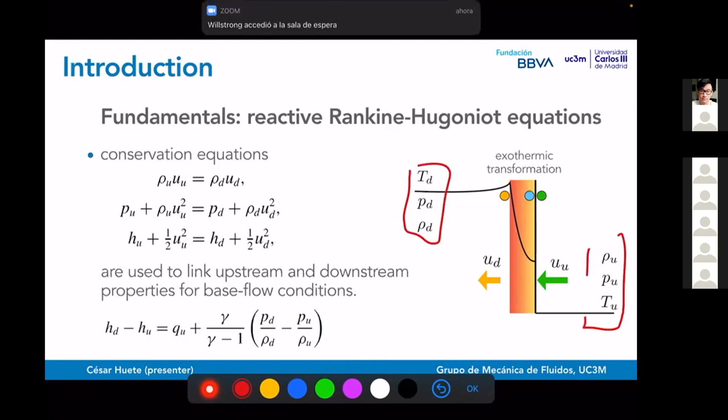If we look at that in the well-known Rankine-Hugoniot curve, it's quite simple to see what is going on. You start with the initial condition for density and pressure, or specific volume in that axis. And then the blue curve corresponds to all possible post-shock solutions for inert shocks, right? So if we take the Zeldovich-von Neumann-Döring configuration, we move from the green point to the blue point, and then we move downwards to the orange points, with the orange curve corresponding to the Rankine-Hugoniot for an exothermic reactive wave, that is, detonation. So far, it's quite simple.

The thing is that we have to be careful, because there is no length scale written here. From green to blue, it is of the order of the mean free path, but from blue to orange, there is actually a macroscopic, or sometimes even larger, length scale. So careful with that.

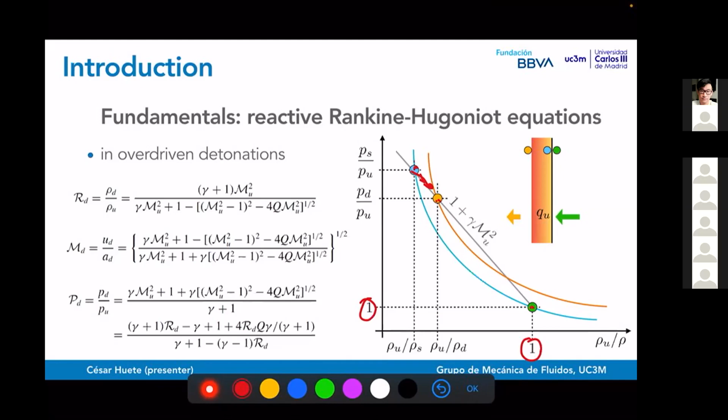Well, the point is that the Chapman-Jouguet conditions are the tricky condition for detonations, but are also those that really happen in nature. If I have a higher heat release, the orange curve moves upwards, and there is a maximum heat release or a minimum propagation velocity that is called the Chapman-Jouguet condition, right? Well, this condition is singular because this condition is given by the sonic condition downstream.

What it means is that if you trigger and you are expanding, you see that from blue to orange, we are moving, sorry, this is the other way around, to higher specific volume, lower density. So we are expanding, we are accelerating, we are having a rocket type effect pushing forward the shock wave, right? But this critical condition is the maximum expansion we can get.

Because if you look at the characteristics, from that point forth, I don't know what's going on. This is acoustically decoupled. We cannot affect outside because my region of influence is bounded by the sonic condition. So it's the maximum expansion I can get for a given heat release.

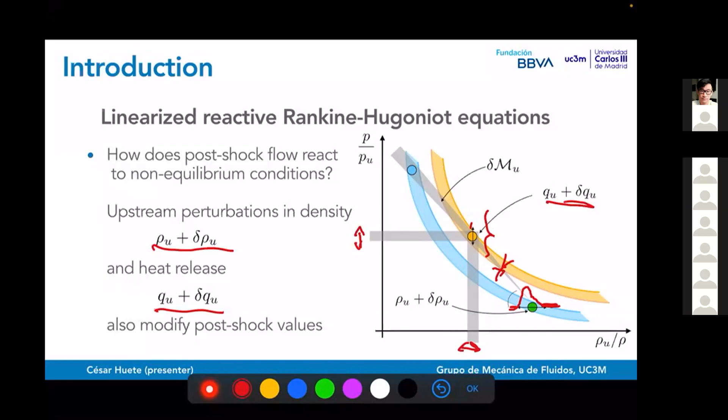And the shock also reacts with the perturbation in the propagation speed, so the slope of this Rayleigh-Michelson line is also affected by these perturbations. In linear theory, the amplitude of the perturbations downstream is of the same order as the perturbations upstream, right? If you include nonlinear terms, things have to be rethought carefully. So let's look at the initial value problem. Think about, instead of having a planar detonation, it eventually gets distorted, right?

And still we think about the fast reaction limit, that everything is burned right behind the shock. So we don't see an inner structure. And I will talk about the inner structure at the end of the talk, actually to get some feedback about some thoughts.

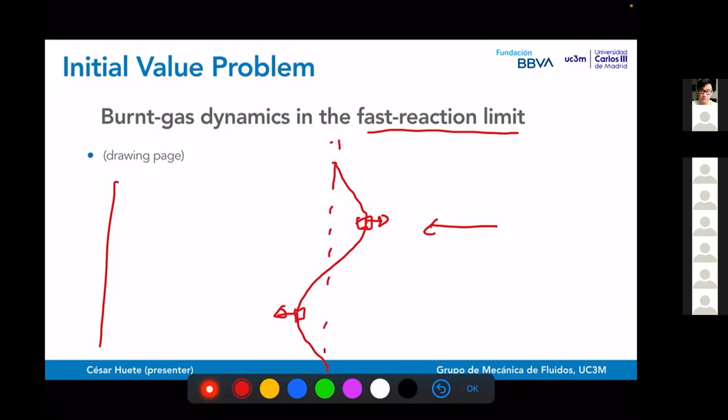But there is another thing which is even more important, actually coupled with that, is that because here, locally, we have an oblique detonation. So we are generating a transverse velocity flow downstream that in principle didn't exist upstream. So if you look at the final picture, what we have is this tangent velocity generated across the detonation.

And if you see what is going on is that, okay, I had a distorted detonation, okay? But because of the tangential velocity, I'm pushing mass here, increasing pressure. I'm increasing pressure here, and I'm lowering the pressure in this region. So the gas dynamics behind the detonations tends to reduce this distortion and actually plays the opposite role. The effect wants to move the detonation into the planar shape in both directions, right?

But the thing is that it's not that simple because this is a dynamic problem. And what we find at the very end is that if you look at the detonation amplitude, it actually oscillates, because there is a characteristic time here given by the speed of sound downstream and the characteristic wavelength. And this competition of these two effects takes its time. So it's like here I'm winning and losing and so on. Okay, so this is essentially what happens with the gas dynamics behind the detonation, if we neglect the effect of the inner structure.

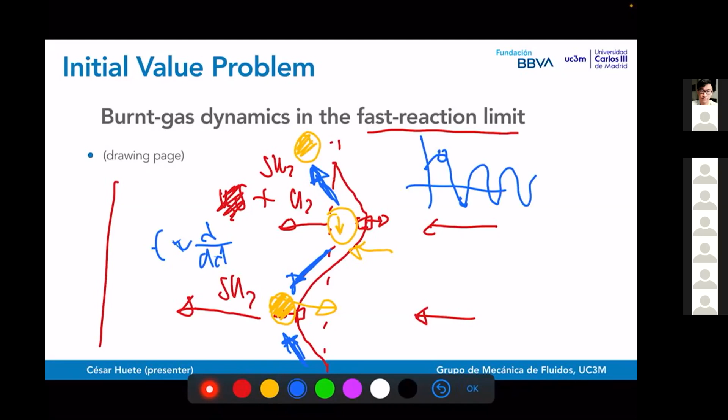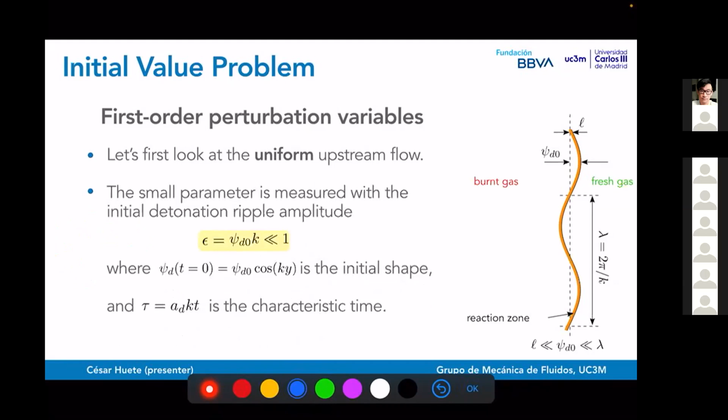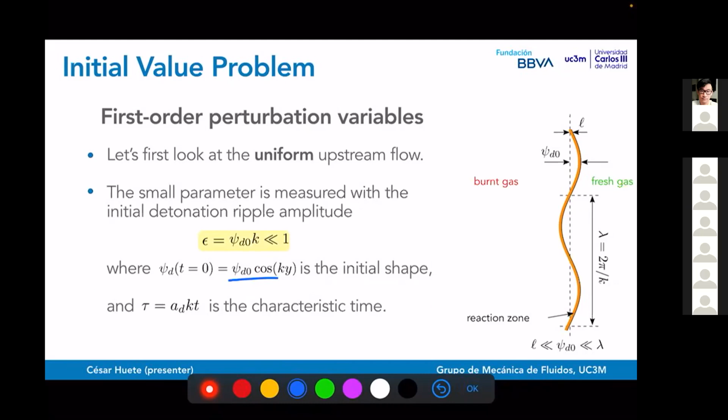But when you look into non-linear terms, this effect is important and plays a role, because you have to evaluate the weights of this term in comparison to other effects, right? So the same for pressure. We are looking into how pressure deviates from uniform conditions, the same for density, velocity, longitudinal and transverse velocities. And the initial value problem is saying, okay, at a given time provide initial perturbations. Let's see how the detonation evolves due to the gas dynamics counter effects that play right behind the detonation. Those I've shown to you before.

So to do that, the only thing we have to do, and it's not that trivial if you want to look at the transient, is to couple the Euler equations, because once the combustion is over, at this speed, diffusion and viscosity do not play any role at the beginning. Afterwards, of course, it will play a role, but behind the detonation, it does not. It's very high Reynolds. And you have to couple that with the boundary conditions at the detonation. And this is the linearized Rankine-Hugoniot equations that take into account the tangential velocity, and this is actually conservation of mass, momentum, and energy coupled.

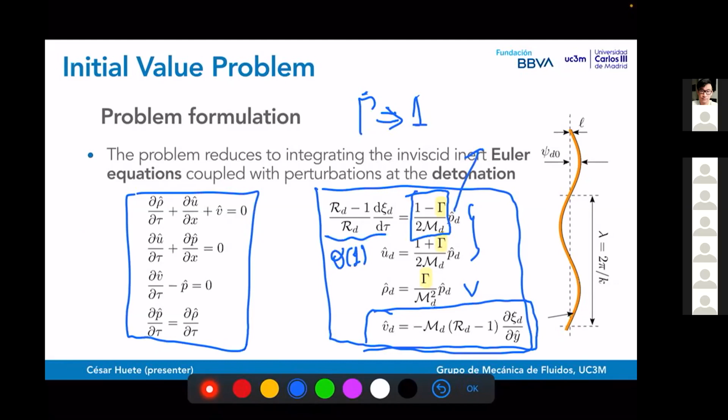Anyhow, what happens in the Chapman-Jouguet limit for the linear perturbation problem? If you remember, gamma tends to unity in the Chapman-Jouguet limit. So look at what happens here. This factor tends to 0. This is not 0; this is an order of unity term determined by the tangential velocity conservation. We have something that tends to 0 here. So pressure grows unbounded if you look at exactly Chapman-Jouguet conditions; it tends to infinity when gamma tends to unity. That's why you cannot place exactly Chapman-Jouguet conditions in the fast reaction limit.

To solve this, there are strategies that I showed in the detonation shock dynamics theory. You can decouple the sonic locus from the reaction region, and you can work it out. But if you look at the fast reaction limit, there is no way to get away from that. Fortunately, it happens in a very, very weak manner. I mean, you can move to weaker and weaker overdrives, and it's not that bad, okay?

So actually, the Euler equations, it's just the sound wave equation for pressure. As I told you before, epsilon, the amplitude, does not play any role in linear theory, and it has to be solved with 2 initial conditions and 2 boundary conditions. One boundary condition is given at the detonation, the equation I showed you before, the one that you cannot see right now. And the other is given by the piston pushing our detonation.

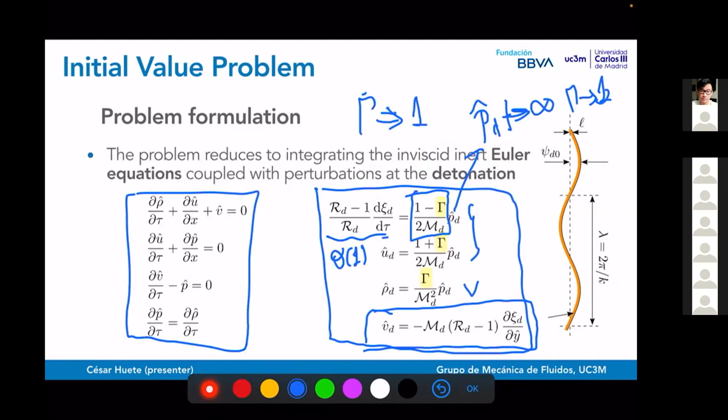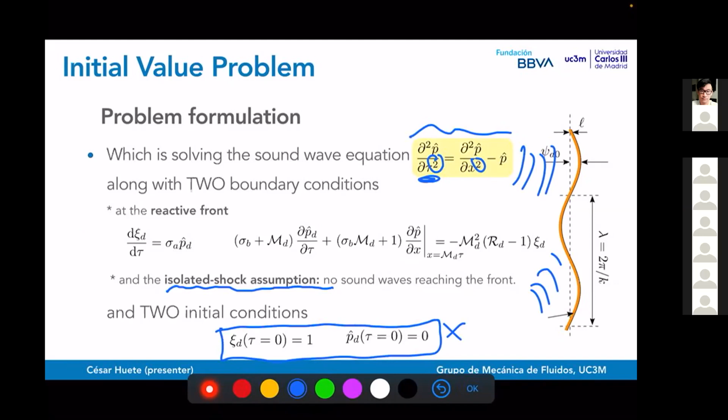If we assume that this is isolated, it means that there is no wave reaching the detonation from behind, okay? And this is a very justified assumption when we are dealing with weakly overdriven detonations, and I will tell you why in a minute. And then there are the 2 initial conditions. For the asymptotic problem, for the long time regime, they don't matter at all. The asymptotic value in linear theory does not depend on the initial conditions. But if you want to look at the transient, you have to properly take them into account.

So this is in the burnt gas reference frame. Let me show you first the laboratory reference frame. You have a detonation in space-time, and particles do not move until they reach the front, and the detonation pushes them, following the detonation, right? It's like an oblique detonation in the xt space, like in xy. It looks like a steady oblique detonation.

But here, if we want to stay in the burnt gas reference frame, we are rotating this in such a way that this is straight, and this is like that. Okay. So what we see is that in the burnt gas reference frame, the fluid particles are moving toward us, and then they are put at rest right behind. The important thing about Chapman-Jouguet is that these characteristics, which you can split into sound waves moving backwards and sound waves moving forwards, close to Chapman-Jouguet become parallel. Okay, the C-plus characteristics become parallel.

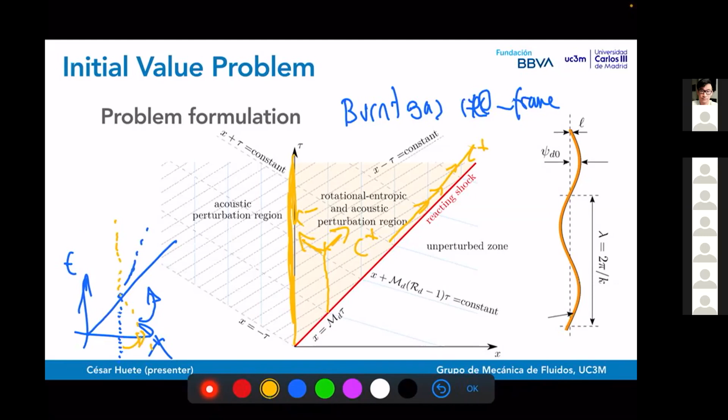But the most important thing here is that even if we cannot look into purely Chapman-Jouguet conditions, because they become singular, as we have shown before, they don't matter at all. I need a piston if I need some overdrive. I need something to keep the pressure higher than found in Chapman-Jouguet detonations. So I need a piston for sure. But the effect of the piston is negligible in weak overdrives because of the Doppler effect. And let me show that because I think it's interesting.

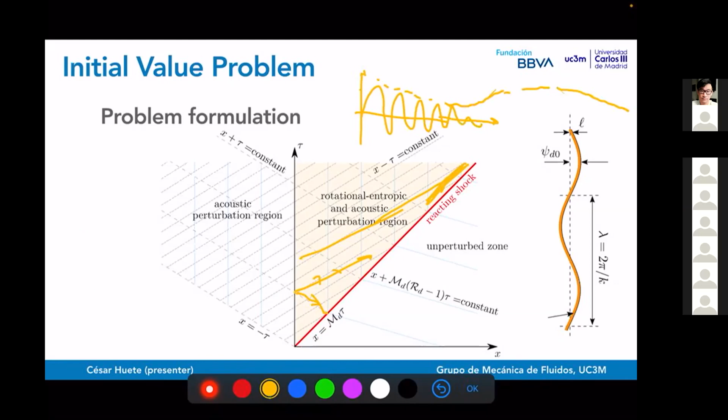Think about what I told you before. You have a detonation with a given frequency, oscillating in time, assuming that it is stable. Okay. If I include the piston, there is some reverberation, some reflected wave going back and forth, back and forth. But because these are almost parallel, this frequency is much slower. Smaller frequency, much larger wavelength, so that in our time reference frame, the role it plays can be neglected. So we can use this isolated assumption for weak overdrives.

I will not go through the details, but the point is that if you know the Laplace transform for the detonation pressure, or here the detonation amplitude, if you know one, you know the other, and you can do the proper integration and calculate the transient evolution. Okay, and this is, for instance, what you find for the detonation. Initially it is unity because it is used to non-dimensionalize the problem, and this is pressure. This is the history of the pressure at the detonation, and the other is the pressure in the whole

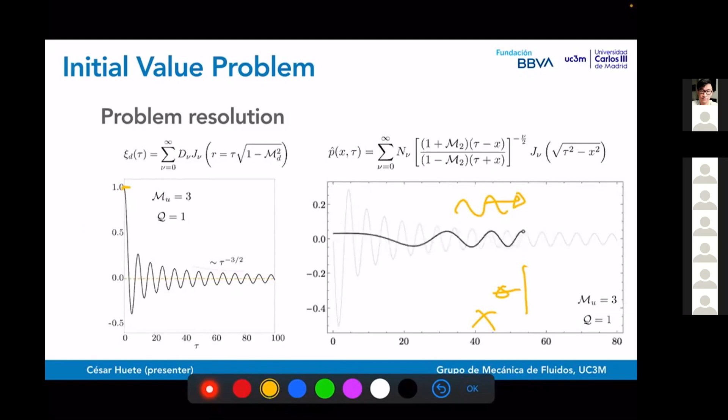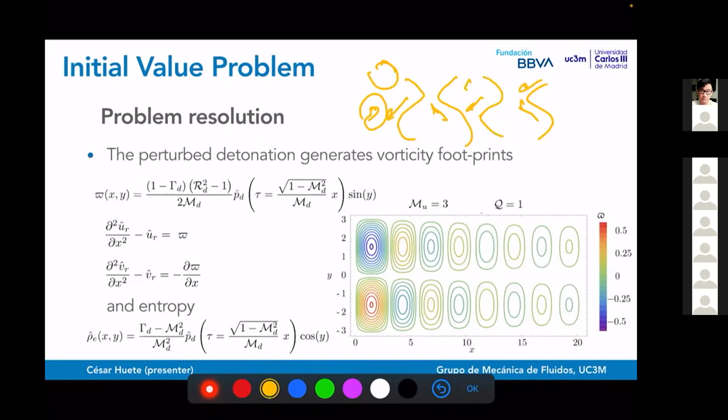spatial domain downstream. What you see here is like sound waves following the detonation. But if you place yourself at the detonation, they are escaping. It's somewhat tricky, trying to cheat us, but they are not catching up with the detonation, because we have assumed the detonation travels isolated. It's just a visual effect associated with these pressure perturbations, and actually with the dynamics of the detonation, moving like that to generate different tangential velocity patterns. You are building vortices downstream, so you can look at the vorticity footprints behind the detonation too.

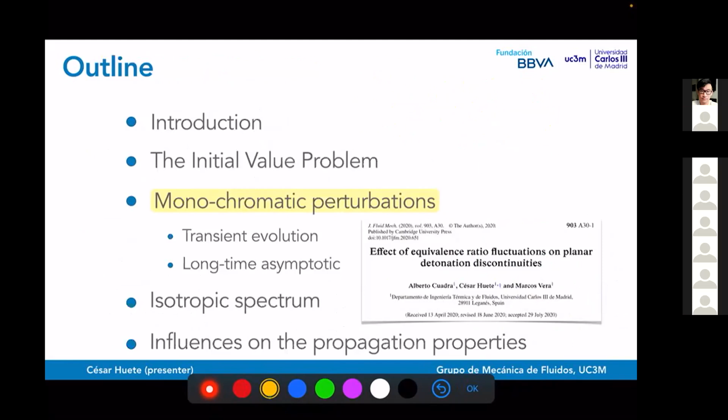Well, now let's look at the problem, and we'll see that the mathematical formalism is quite similar. So I think we are now ready to use it to include not the initial value problem, but a continuous excitation at the detonation front. So this is the problem configuration, the same as before, but I'm now continuously giving the detonation that here density is higher, here is lower, and so on.

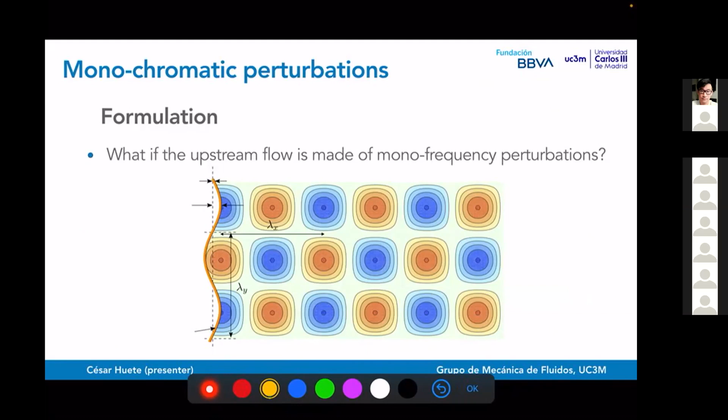So the thing is that now we are opening many variables. For instance, other perturbations, maybe perturbations in pressure, density, velocity, fuel mass fraction that is associated to enthalpy of formation. So you have many of them. Now you have to model not only the detonation, but you have to model why your flow upstream is not uniform. So you need to set your problem in a proper configuration.

And you say, for instance, if you are looking at what is usually done for shock waves in turbulent boundary layers, you can apply the Morkovin hypothesis to correlate density and velocity perturbations. If you are dealing with some turbulence mixing, depending on conditions, they are correlated in a different way. So now you have like two problems that you want to put together. One is the detonation, and the other is what is giving you the perturbations upstream, okay?

So now we have the length scale, but we also have the detonation length scale associated to the thickness, right? So for the thin detonation to be okay, you have to be in the limit that this is much smaller than the perturbations upstream. Because we have two lengths, two independent lengths. They are different problems. I mean, this perturbation has nothing to do with the detonation thickness. So that's why you have to say something from the external model about which one is the dominant one.

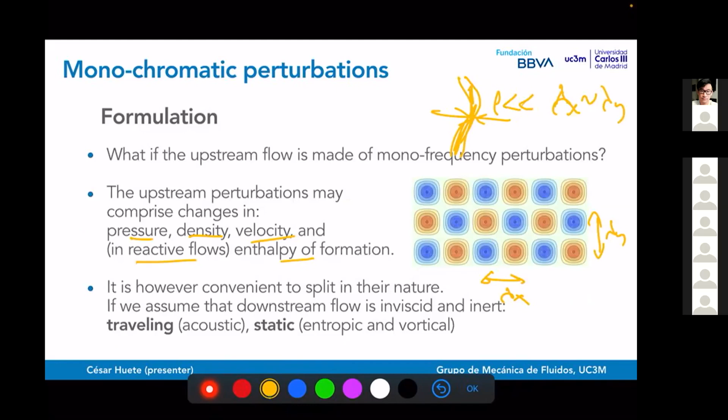Well, we are lucky because detonations are typically led by strong shock waves. So if you go to the Rankine-Hugoniot equations, the same as shown to you before, we see here that we have this term that converges to an order of unity value for a strong shock, but in the denominator we have the Mach number. And for pressure, we have the same thing. This is order of unity in the strong shock, and the Mach number grows unbounded with the shock strength.

So we can actually neglect the velocity and pressure perturbations if the amplitudes are of the same order as density, because what dominates in the strong shock limit is density. The reason for that is quite simple. If you look at the mass compression ratio for a shock wave as a function of the Mach number, you see that it does something like that. For a planar detonation, you have a lower density downstream because of the expansion of the reacting flow.

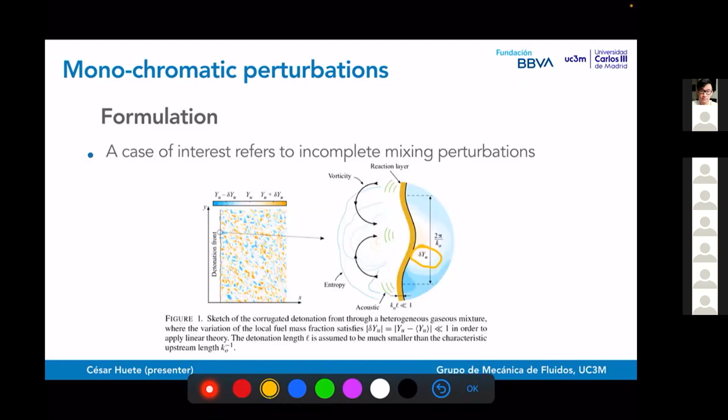So that justifies, even if you have a mixing effect where density, pressure and velocity are not in equilibrium because of the mixing process occurring ahead of the detonation, forgetting about the other variables. You have to focus on the upstream density because this dominates the detonation behavior downstream. So the case we want to look at is what happens with incomplete mixing upstream. We have to model how variations in the fuel mass fraction relate to the variables that affect the conservation equations.

And I think this is the most important part to understand the role of these perturbations. Think that you have this non-uniform pattern upstream, with some points having a positive fuel mass fraction perturbation and others a negative one with respect to the average mixture. If you have a very light fuel, the positive fuel mass fraction gives you less density. If you are on the right-hand side of the heat release peak, these perturbations give you a lower heat release. And this counter effect produces destructive interference.

Less density is less opposition. I want to move forward. Lower potential, lower expansion, lower push by the expansion. It wants me to move less. I mean, in talking perturbations. So they compensate each other.

I mean, compensate. We have to look at how big they are. But qualitatively speaking, they compensate. So they render a destructive interference. And the same occurs here with the opposite signs. Now, if we have less density but a higher potential, these two effects go in the same direction.

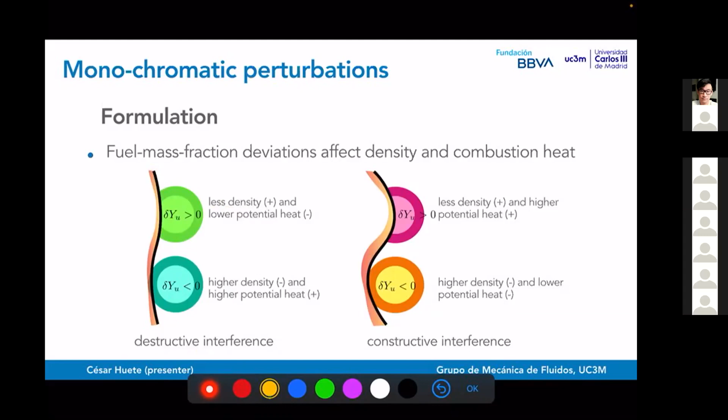Less density, the detonation wants to move faster because there is less opposition. Higher potential, higher combustion heat, it wants to move also in that direction. So, for instance, what can we do to look at that? Is to look at different curves for density as a function of the fuel mass fraction relative to the stoichiometric mixture, and the same for, okay?

So looking at that, for instance, if we look at this curve for methane, we see that this density is practically linear here, it's almost linear with the fuel mass fraction, and we have positive values of the fuel mass fraction. Perturbation will give me lower density because the slope is negative.

And here we have the other curve, which is the potential heat of combustion. If we are close to the stoichiometric condition, we have the maximum, not exactly at that, but roughly speaking at that. We may have constructive interference on this side and destructive interference on the right-hand side. And we can get the opposite thing if this slope is reverted for heavier fuels.

And this, actually, I didn't comment that, sorry. Yes, no, it was here.

The perturbed density is given by the average plus the variation of the fuel mass fraction times this slope. This slope is how density changes with the fuel mass fraction. And we have the same thing here. The variation of heat release is the average value, and we include the variation of the fuel mass fraction, and H is the variation of heat with respect to the fuel mass fraction.

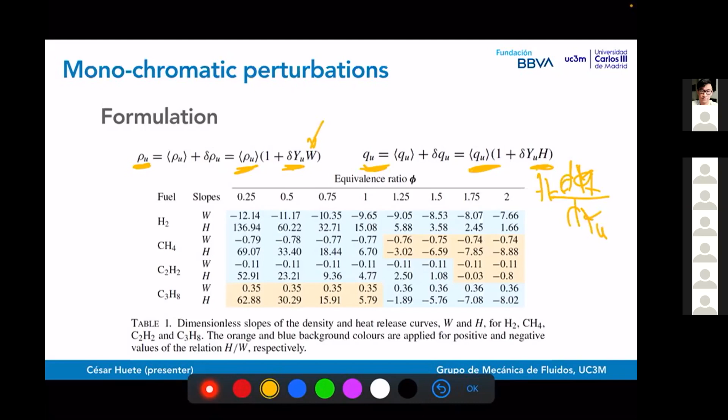And we see these blue and orange regions correspond to positive and negative interferences, as I told you before. So how can we solve this problem when we have a continuous perturbation field upstream? So this is the same as before. I mean, these are the same equations, but we have to include this upstream excitation term.

And this is what we do if we look directly at the asymptotic theory, when we assume that we can actually apply normal modes analysis. And here we have our amplitudes relative to whether we are in heavy or lighter fuels, and on the left-hand side or right-hand side of the peak in the heat of combustion.

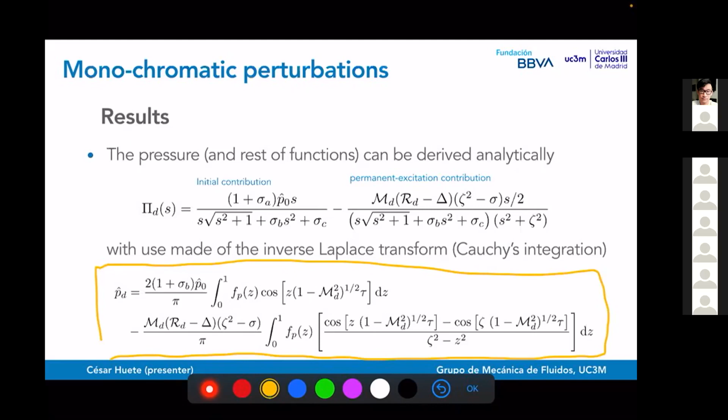So the good thing about the perturbation analysis and the Laplace transform is that we can get exactly the pressure as a function of time. So this is an analytical expression. And we find different solutions depending on the oscillation frequency. If the detonation oscillates with a low frequency, low in terms of this kappa x, kappa y, which is actually lambda y over lambda x, right? This is of course the wave number and the wavelength.

It generates pressure that decays in time. If the frequency is sufficiently high, it crosses this value unity at this critical frequency. I mean, it scales with that critical frequency. That's why the key thing is unity. You have constant oscillation of pressure following the detonation, the same movie I showed you before.

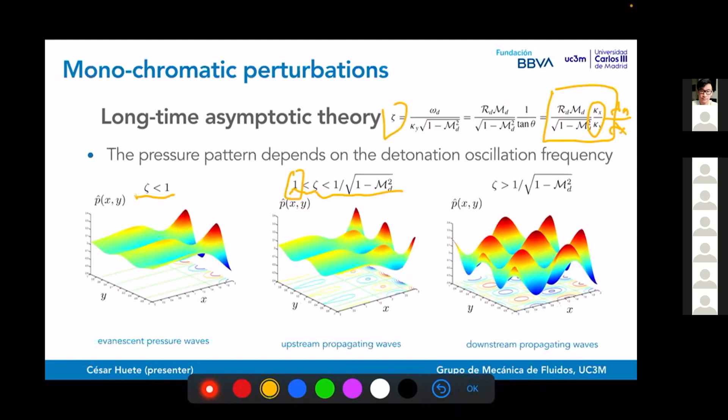And if the frequency is sufficiently high, the vector defining the pressure field points backwards, and all your downstream flow will be filled with sound waves. Another thing we have shown in our work is that you can find solutions where there is no pressure perturbation downstream, and they are given by these counter effects between density and heat release.

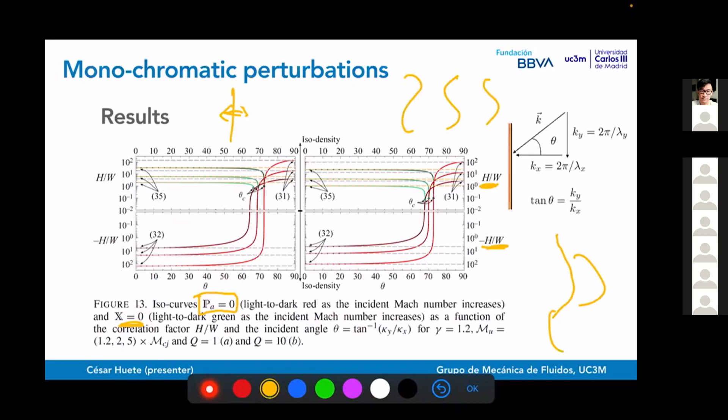pressure disturbances downstream. But you can also get conditions where there is no ripple. It's like this destructive interference is giving you no ripple, but it's giving you a longitudinal oscillation. It's moving back and forth with respect to the planar position, right? But it does not generate a ripple. So that's a very nice thing we solved for.

We can also compute, and this is important to calculate the turbulent spectrum, the value of, for instance, the rotational contribution of velocity as a function of the angle, right? So depending on the angle, which is essentially depending on lambda x over lambda y, you get a different value of the density or velocity perturbation downstream.

So here it is plotted in a polar plot. I think it looks nicer, but at the end of the day, if you look at this angle, depending on the angle, you have a different amplitude for these perturbations. You can do that for velocity, density, pressure, or whatever.

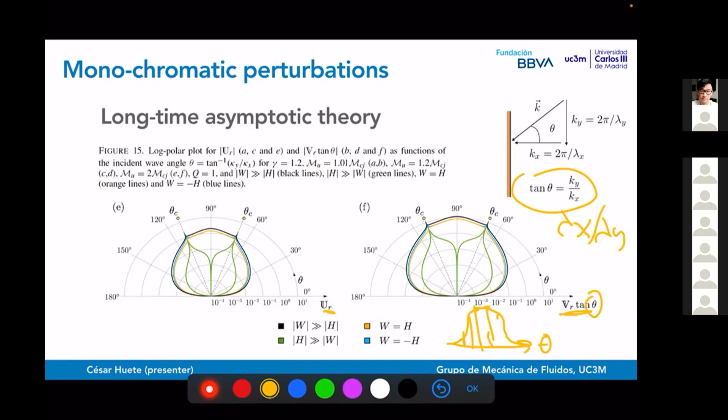Now, these amplitudes were given in the long time regime, applying normal modes analysis, what I showed you before in the equations. You cannot use the normal modes analysis to calculate the transient evolution. And we have to be really careful about that, because if you are close to the critical conditions, close to zeta equals unity, then it takes a lifetime to get the final asymptotic value.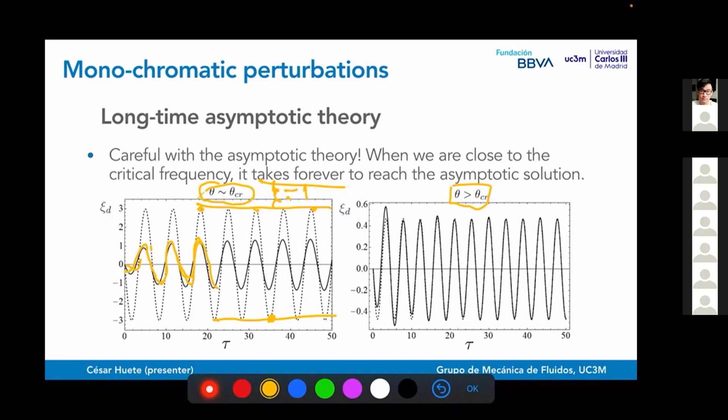This is the asymptotic expression, what the normal modes analysis gives you, and this is what is actually happening at the detonation if you start the initial value problem from the beginning. So it might be unrealistic to consider this amplitude in the long-term regime, because it takes forever to achieve that. And if you move to a higher frequency, the asymptotic theory and the transient evolution are effectively the same after three oscillations.

So an open question that I have no answer to is what happens if we include nonlinear perturbations, something that can be done with a numerical code. My question is related to one of the hypotheses I assume here. I'm assuming that the detonation is stable, okay? It's like a base flow, no perturbation. The initial value problem gives you a constant in the long time regime.

But in most practical cases, the activation energy is high, and the temperature sensitivity in the exponential of the reaction rate gives you the unstable cellular pattern that all of you know. So I wonder if it is possible to generate a passive control, forcing the detonation to do what you want. Like, I have a very low density here, a very high density here, and this nonlinearity governs the detonation instead of the self-induced oscillations of the detonation wave.

So it will depend on the amplitude, so linear theory cannot be applied, and it would depend on the frequency. And there might likely be a frequency from which you can do that.

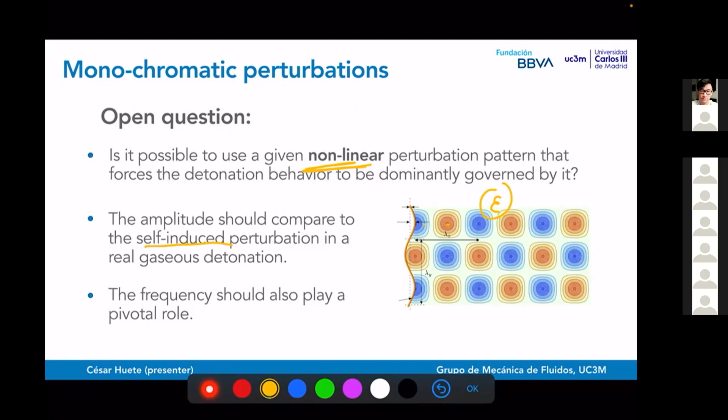Well, let's look now at the isotropic spectrum, which is what happens when you have a real mixture. To do that, we have to move from the single mode problem, single frequency, to a spectrum. We assume that we have an isotropic spectrum upstream. There have been a few works on that. In shock waves, the original works were done by Ribner in the 50s. In detonations, with the same assumption as here, including the fast reaction limit, they were done by Jackson in the 90s. So the theory here about the turbulence generated by the detonation is the same as in those papers.

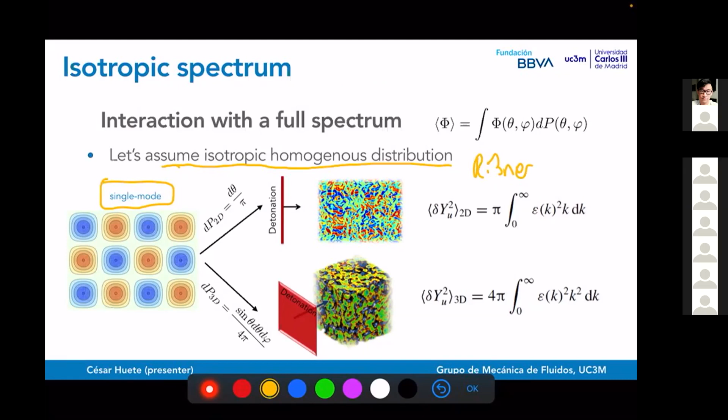What I'm going to do is use these effects, which are pretty well known, to calculate how they affect the detonation velocity. And this is something that I haven't seen in literature with this formulation. Okay, the first thing we need is a probability spectrum, right? I told you that, for instance, velocity depends on the angle of the perturbation upstream. Actually, it depends on how these two guys are related.

But we have to include a probability density distribution because some of them may happen very likely, and some of them are less likely to happen. If we are in an isotropic spectrum, we have to add another spectrum to weight these values.

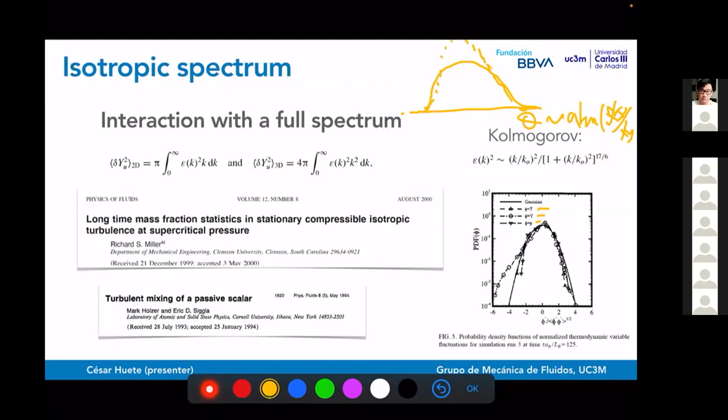So when looking into mixtures, this is like a passive scalar, you see that if you look at the fuel mass fraction, temperature, and pressure, they mostly look the same for an isotropic spectrum. That suggests that you can use the same type of spectrum used for turbulence but apply it to the fuel mass fraction. And it makes sense because if they are generated by the same phenomena, they have to be correlated for sure. So we can calculate the isotropic spectrum.

We can, for instance, calculate the acoustic contribution, the rotational contribution, in 2 dimensions and 3 dimensions. For the linear theory, there is no difference at all. Instead of doing the average in this, you have to do the average in that. But there is no computational penalization that you will find.

If you have to do a numerical code accounting for everything, it for sure is not that. It's much more complicated. And you can also split into, as I said, 2D, 3D, rotational and acoustic, or longitudinal and transverse velocities. The thing that is important here is that we are plotting different correlations.

The black lines are when density dominates the perturbations upstream, the green line is what happens when heat release dominates the perturbations, when they are the same, and the same but with the opposite sign. They are not limiting cases, but these are the distinguished cases. I'm not going to explain all of them; this is to get a rough impression of what you can do.

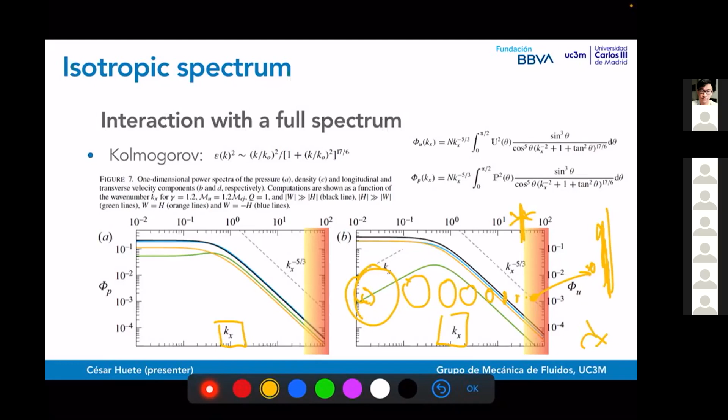At some point, they will become comparable to the detonation thickness. So this limit has to be determined by the characteristic length of the turbulent spectrum upstream and the characteristic length and time in the chemical process. They are two independent variables, and you have to look at that to see if this spectrum may apply or not.

And finally, once we have moved from the initial perturbations, oscillations, and spectrums, we are ready to tackle how these perturbations downstream affect the shock propagation properties. We started this work because there were a few works before on shock waves using a model similar to what I'm going to show you now. For shock waves, they find that if you generate turbulence downstream, this turbulence modifies the average values of the Rankine-Hugoniot equations. As a consequence, the velocity of the wave, a shock or a detonation, is affected by this generation of turbulence.

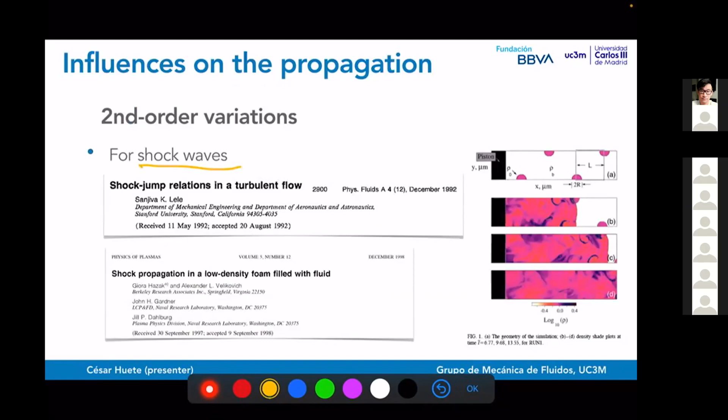For example, you remember the curve I showed you before. This is the Rankine-Hugoniot curve. There are second order corrections to the specific volume or pressure associated to the turbulent averages. And that's what we want to look at.

We draw this arrow in these directions because this is what actually happens. If you look at a shock wave, forget about the correlations between the fuel, the heat of combustion and density, what you find is that pressure is lower and density is lower when doing these turbulent averages. So this is really similar to what you find in a detonation in the qualitative picture.

You remember we had the blue point and we moved to the orange point exactly in the same direction. So qualitatively speaking, what we have is like for a shock wave, we have like an exothermicity taking place. It's not that, but in this plane, it looks like that. So we thought that, okay, if turbulence makes a shock move faster, maybe it's exactly the same for a detonation. Instead of that, we have to include also the heat release, but there is this effect that may take the same role.

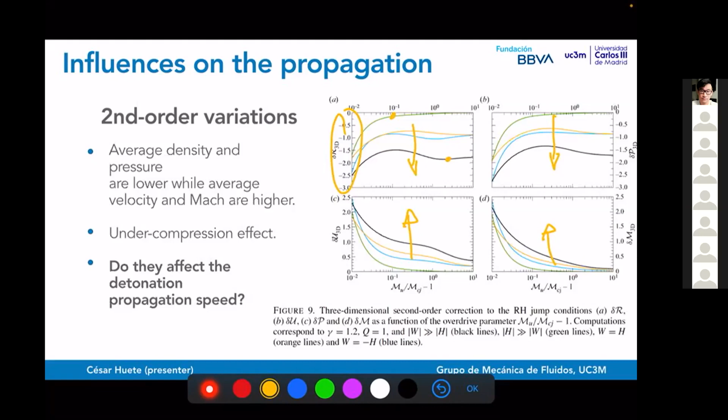So the effect of the turbulent averages is similar to that found in exothermic reactive shocks like detonations. So we are expecting a correction to the velocity in the positive direction. We expect a faster propagation speed. And for instance, I think Xiaosheng will talk about that in the next session, but they were doing numerical simulations on this overdriven condition and the Chapman-Jouguet, and they find that the average velocity is usually higher. You can stop me if I say something wrong.

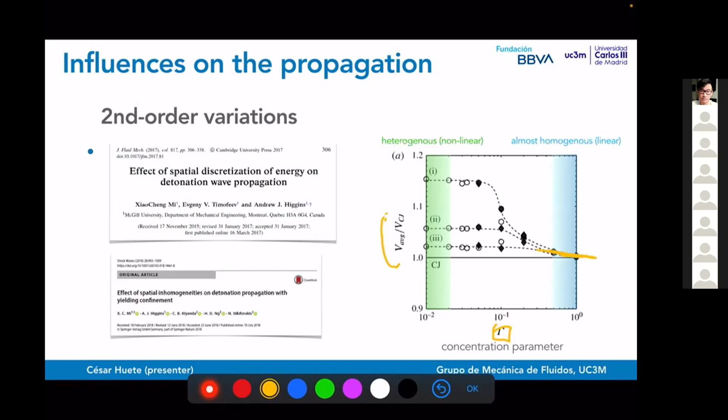They are allowed to use non-linear perturbations. Actually, they can concentrate quite high the energy of the perturbations upstream. Here, what we can compare is the values when this gamma, which is the concentration parameter, is close to unity, which is like the almost linear perturbations we are looking at. It's like perturbations are highly diluted into the gas. So for us, this slope is what we use to perturb our problem. Of course, with the code, they can go much further and look into the nonlinear problem.

This is important because what I told you before is that density is lower, pressure is lower, velocity is higher. This is the same thing that happens in an exothermic reaction. This is the expansion of the flow. The thing is that if you want to close your problem, look at the pressure, or look at the velocity, which is really simple to understand. You are telling me that on average, velocity of the flow is higher.

But think about the case that I have a moving piston, and this is me, the piston, controlling the flow particles behind the shock wave. Think about the shock, this is easier. The average in the velocity has to be zero, because this is me with the piston telling the fluid particles which velocity they have to move. So this is like a contradiction, because the Rankine-Hugoniot is telling me that velocity is higher, but it is the piston which tells the fluid particles how to move.

Well, what breaks this paradox is that we haven't said anything about the velocity propagation speed. Actually, what we are saying, if we are moving at a constant speed with no perturbation, then delta U must be positive. But this is moving in that reference frame. I can do the opposite analysis. What would be the correction to the velocity so that these perturbations in velocity are zero according to the piston that governs the fluid particles behind?

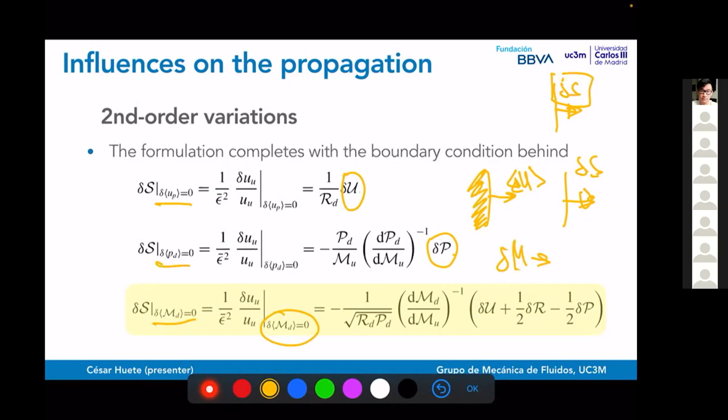And we have to talk to XiaoCheng, because in that case, the theory aligns well when density perturbations dominate. But here, maybe there is an over prediction when heat release takes a dominant role. So we have to do the proper quantitative comparison. But to do that, we have to run the numerical and theoretical experiment with the same parameters, because there are too many free parameters to do a real quantitative comparison, which has to be done later.

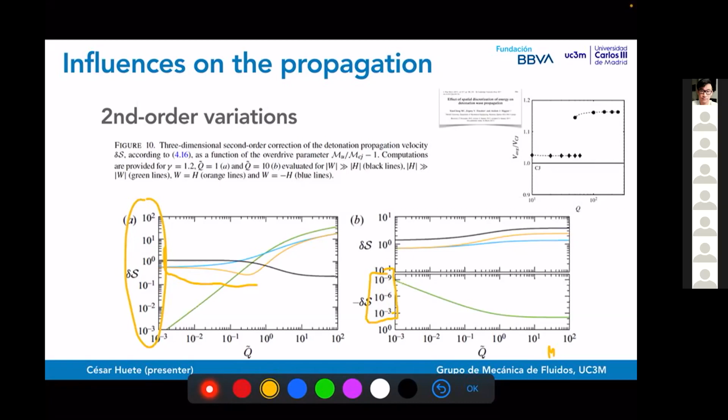And we can also look at heat release. And again, we see that in most of the cases, you get a positive. Here it is always positive. But when you look at the strong overdrive, you may find negative deviation of the shock speed. But look at the numbers here. What theory says is that the speed of the detonation is corrected in a negative way; it moves slower, but look at the numbers. I'm sure that the error bars associated to the model are higher than these values predicted by theory. So I take it carefully, because this is not an order of unity correction.

So to conclude, we have shown that the thin detonation limit allows you to write analytical expressions. It can be very good to compare the transient evolution of the detonation front. We can apply the work for turbulence perturbations upstream. We can include the effect of the second order perturbations into the analysis to calculate how this turbulence, generated or amplified depending on conditions upstream, affects the propagation velocity, which is the most important contribution of this work. And we find that in most of the cases of interest, because of the extra expansion generated by turbulence, the detonation is seen to propagate faster, okay?

My question is about this perturbation you introduced in energy release. Basically, if you introduce the perturbation in the composition, that changes the density and also changes the equivalence ratio, so that the energy release is changed. So in that case, if the average case is stoichiometric, then you actually make the mixture leaner or richer by introducing these fluctuations.

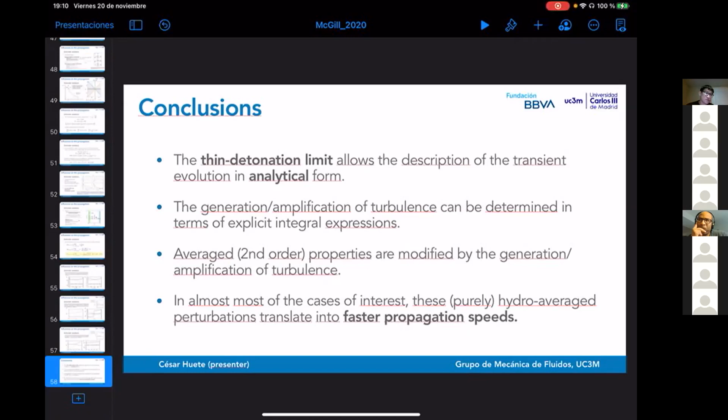Of course, this is theoretical. You cannot move far away because there are flammability limits that are not taken into account here. So maybe it is not appropriate to look very far away in this region, because you will find that at some point there is no reaction at all. Right. Okay. Yeah, that's one of my questions, and maybe I would like others to ask first.

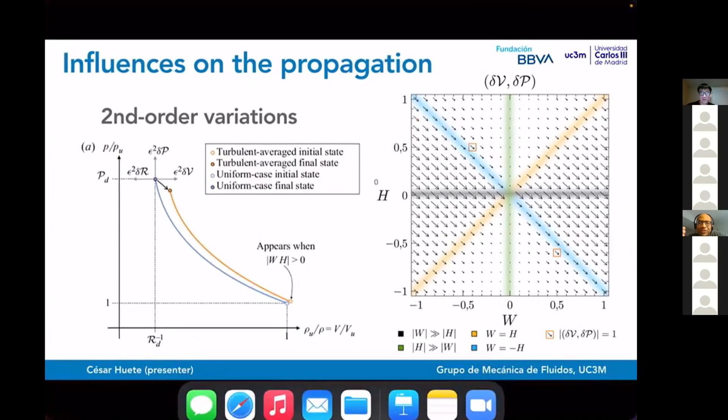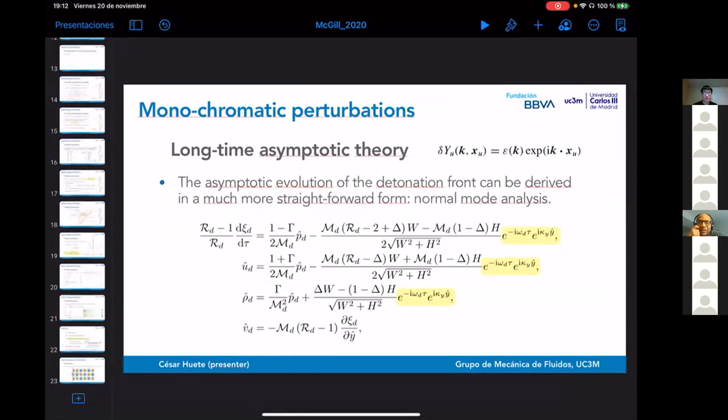Maybe if you can just go back to where you presented the perturbation equations, the perturbation dynamics in the first third of your talk. So you're looking at the perturbation dynamics in the flow downstream of the burnt surface of the detonation, with the detonation sonic locus as a boundary condition, right? Yeah, this is what I'm understanding. So you're assuming a completely thin detonation with no reactive structure to it, and it acts as a boundary condition on the perturbation dynamics downstream of the detonation.

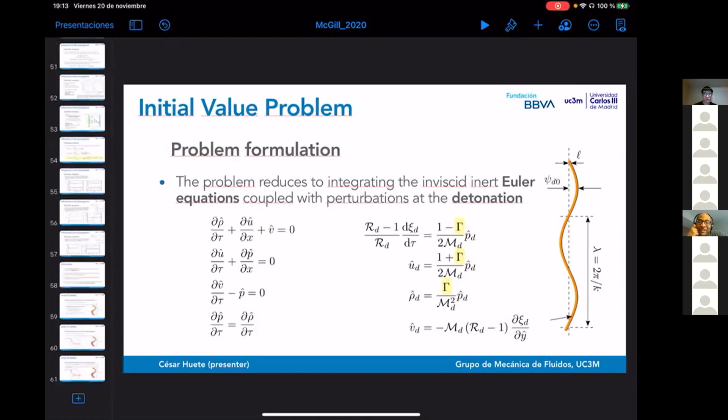Are you able to reconcile this work with, yes, the detonation itself being intrinsically stable or unstable to certain perturbations, and that depends on the structure too. Yes. I find the work you've done, I'd love to sit for a day and have beers and coffee, because I'm wondering if the downstream dynamics may influence the sonic locus, because that's the question we keep having, right?

Whether the sonic locus, however you want to call it, the limiting characteristics or whatnot, can even be treated as a hermetic boundary between the downstream flow and the detonation structure in multidimensional problems. Sorry, this is turning into a long comment, but in the back of my head, what I keep thinking is that by treating reactions as instantaneous and completely thin, it's like you're doing a square detonation wave with zero activation energy, so that it has zero induction time. Is that the underlying? The square.

Oh no! We lost you again. Actually, can you listen to me? I can hear you. You cut out for a little bit.

Yeah. The square wave model actually is like the opposite, and this is actually unstable, unconditionally unstable. This is like the other case. Yeah, we are assuming that this is stable, and we know that it might not be true. Actually, we know it's generally not true. I mean, the work by Short, and there are normal modes analyses including the reaction rate, and they show that you have to be in strong overdrive to expect, and I say expect, to get some kind of stabilization.

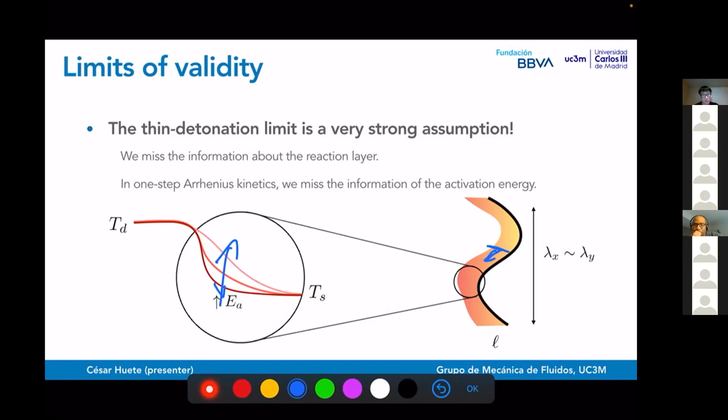I mean, not trying to solve the inner structure, because you have to do it numerically, as far as I know. But trying to use this information as an integral parameter that's telling me, depending on this condition, the tangential velocity would be higher than the other. There would be a flux of energy, momentum, and mass. And depending on this shape, this will modify the properties downstream.

So what I want to do is to use that information in a 1D model and try to include this in the conservation equation. For instance, what I told about the velocity downstream is something like that. But this is for the shock. This is not true for the detonation. So how can we use that to include this information of the inner structure, trying to pose a problem that can be solved analytically from the burnt gas dynamics, but includes the most important information of the inner structure?

I mean, linear theory won't give you the cellular patterns because by definition they are not linear, but at least it can affect the transfer functions: depending on the perturbation upstream, I get that perturbation downstream, and probably it can get you the stability limits. I'm not sure, very likely they are not. You have to go inside, but if so, you can get an analytical dispersion relationship for the detonation front, including information about the inner structure. That would be the main goal with that approximation.

Yeah, I wish we could. Hopefully we can get Mark's comments on your work as well.

Just one last, because the second major assumption that I saw you made in setting up the stability problem is that you assume the infinite Mach number limit. So you're effectively assuming a zero activation. Again, correct me if I'm wrong. So it's the zero activation energy limit with an infinite heat release, basically, is what you're assuming, right? So by using the infinite Mach number assumption to get rid of the pressure perturbation, you got rid of the transfer of the...

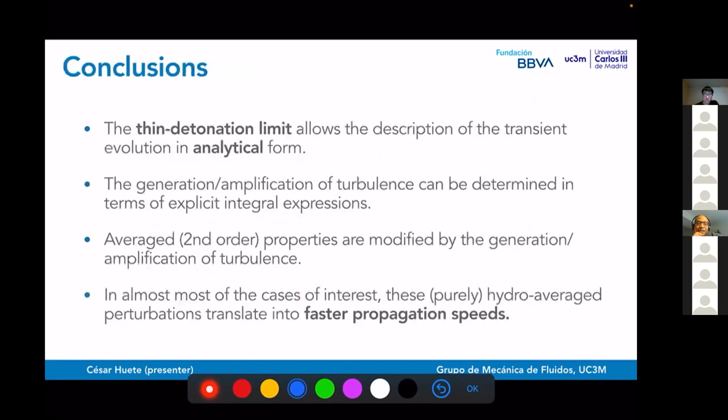There was one slide where you showed what you neglected. Oh yeah. Sorry, the propagation. It was my fault for not writing that one. Yeah, right there. So this is the perturbation upstream. This is the strong assumption. This is the same thing that you do when you solve the Sedov-Taylor explosion problem, where you don't care about the pressure upstream because pressure downstream is much higher. But I'm not neglecting pressure downstream. Maybe I went too fast.

No, but you're... hold on. What are you neglecting here? Then I missed this. Then upstream perturbation. Yes, what I wanted to show here is that you think about a general perturbation problem upstream. You have a mixing in non-equilibrium. Density perturbations coexist with velocity, pressure, and other perturbations in the flow.

Right. But the thing is that if you are looking into sufficiently strong shocks, and this is applicable to detonations, you can forget about velocity and pressure, because in the strong shock limit, pressure and velocity upstream are negligible, because the velocity of the detonation is much higher than the velocity, and also the dynamic pressure is much higher than the pressure upstream. So the same thing that you do for the base flow to calculate, for instance, the Sedov-Taylor problem, you can do for the perturbation analysis.

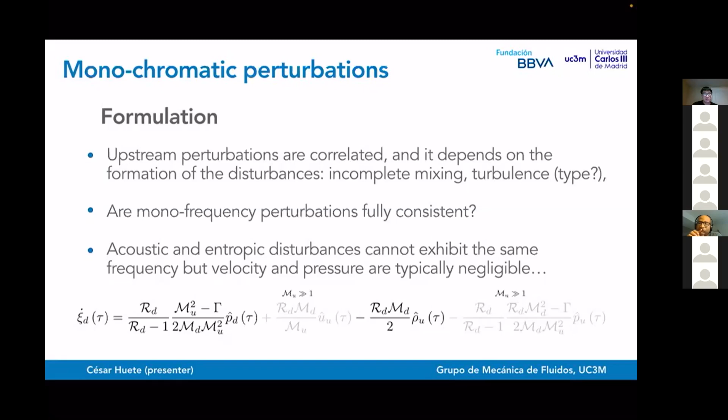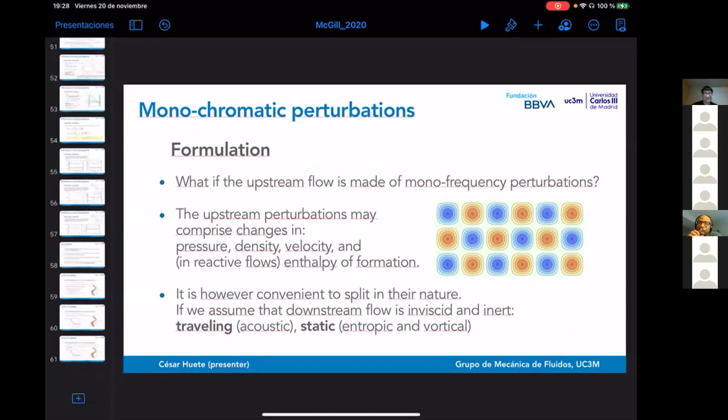But I don't know if there is a way where the medium is still continuous, like a sinusoidal or continuous distribution, and also go to this limit where, as you said, the inhomogeneities in the mixture dominate and totally render the detonation structure, and in that case the intrinsic instabilities are totally suppressed, right? So that's an interesting question. For me, I don't have a quick answer on how to have such a continuous medium to do that. I don't know.

Because one problem is that if you make it continuous and you introduce strong enough inhomogeneities, then you may leave some gap, like an inert gap or not very reactive gap, right? So that may quench the detonation. Yes. Or it's interesting to think about some numerical experiment that we can do, and also you can perform an analysis on that.

Yeah, I think there is a. I was going to. Oh, sorry. Am I interrupting someone? No, I was just going to mention. Sorry. Go ahead.

But it's quite interesting. In the work you did for the slab detonations, or the slab medium for detonations, even in the small gamma limit, by collecting the energy into layers, you're still introducing basically infinite slopes, right? Every time you have one of these layers, you're introducing a delta function inside. There's a big kick to the detonation. Maybe this is what you were just saying now, so I'm sort of rephrasing.